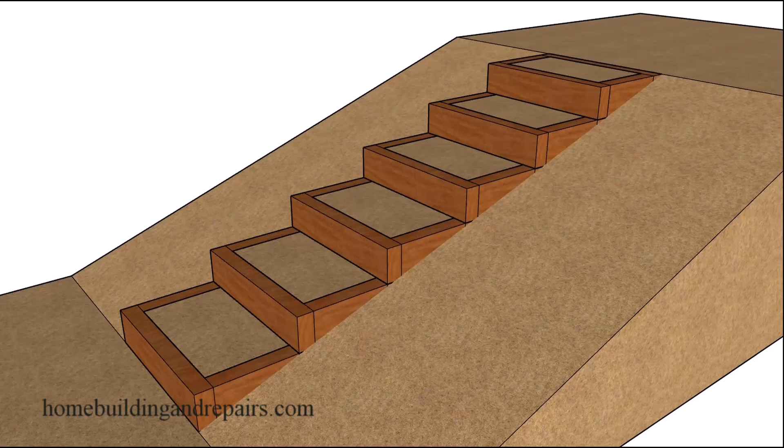Here's another outdoor stairway I come across and wonder why it was built that way, but understand that most of us look at something and think, you know what, that's easy to build and that's a great idea, I'm going to do it the same way. And that's fine, but I'd like to put a little insight or at least share my opinion with you for this particular stairway. And it's quite simple.

It's just built out of boxes. Usually I've seen people use railroad ties actually for this. 6x6s, 6x8s. These are 4x8s. They're 3.5 inches wide by 7.5 inches wide to keep the step at 7.5 inches. The maximum for most building codes will be 7 3/4 inches.

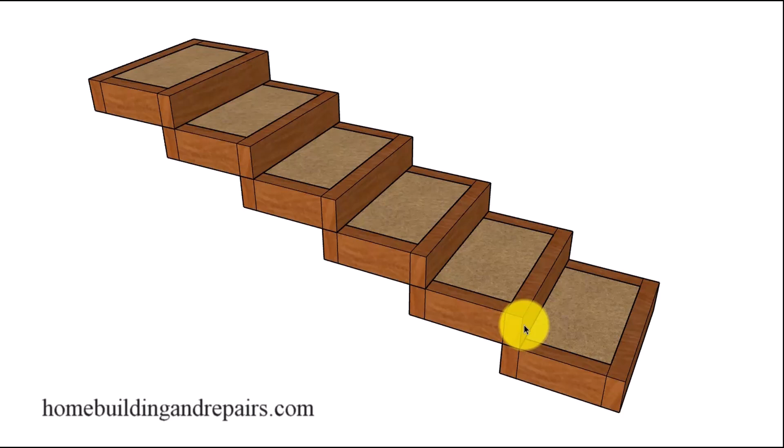If you're doing it for someone who has a difficult time walking up the stairs, you might want to use a 4x6. You might want to use something that's a little smaller, maybe 5.5 inches instead of 7.5 inches. And of course, there's a bottom view of it. Another view, to give you an idea, just boxes stacked on top of boxes and filled with dirt. So in this particular stairway, this is just filled with dirt.

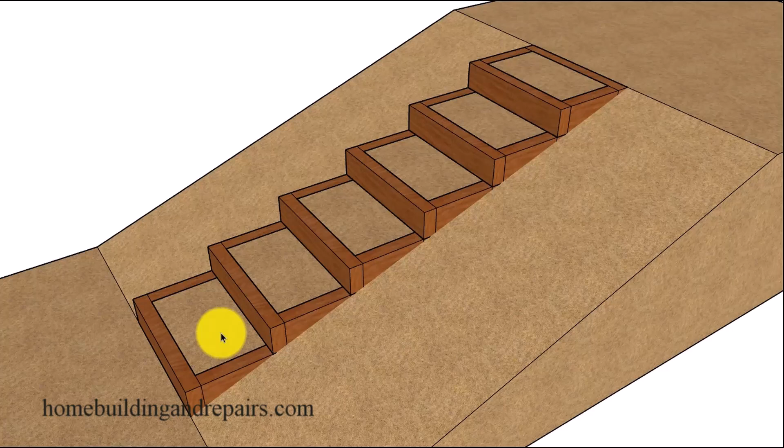I do not like this design because when it gets wet, and depending on the dirt, if it's sand, it's going to be difficult to keep in here. Sand's going to just spread all over the place. And if you get sand on the edge of this, and you're walking down or walking up the stairway a little faster than normal, this is going to be slippery. I do not like sand.

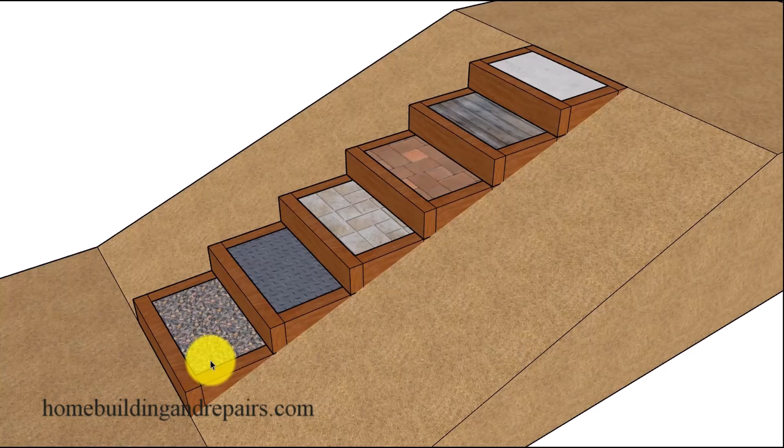And if you're going to fill it with dirt, you're going to run into the problem when it gets wet. This stuff's going to be slippery, and of course you're going to be tracking it all over the place. So dirt, not a big fan of. Now let's go ahead and take a look at a few more products: gravel, metal, tile, pavers, wood, and concrete.

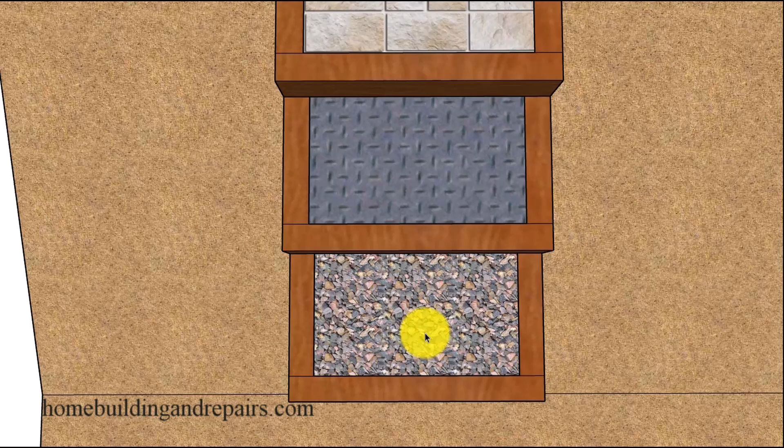And of course, gravel is what you see a lot. People fill it with gravel. And again, I understand this is easy to do. Build your square box out of wood, stack them on top of each other, and fill them with gravel. I see this a lot.

Gravel is going to be difficult to walk on. You walk up and down a stairway in bare feet with gravel, you're not going to want to do it again. Not a big fan of that. Someone runs up the stairway, they're going to knock some of the gravel around. You're going to be filling it with gravel every once in a while or refilling it.

Metal, not really a big fan of that. And of course, you're not going to see this. I just kind of threw it out there for someone who thought, hey, I need a different look. Metal over time could rust, but of course you could get some metals, maybe stainless steel or something galvanized that's going to last a little longer.

And this one here is tile. If you're going to use tile, you're going to have to fill it with concrete. You're going to have some type of a base that the tile is going to adhere to, and most of the time that's going to be concrete for an exterior stairway. So if you're going to use something like tile, why not fill it all the way to the top with concrete and use some type of a decorative pattern, a stamp or something that they use to make the concrete a little nicer. And of course, pavers.

Now, pavers would bring us back to the gravel. This is going to be something that will be a little easier to do. And if you were going to design a stairway using pavers, I would also recommend building your boxes to where you can use pavers without having to do a lot of cutting. So you could see this wouldn't be that good of a width or a length. If this was a little smaller, then you would just have these here. So if you can kind of keep it in a pattern like this, that would work better.

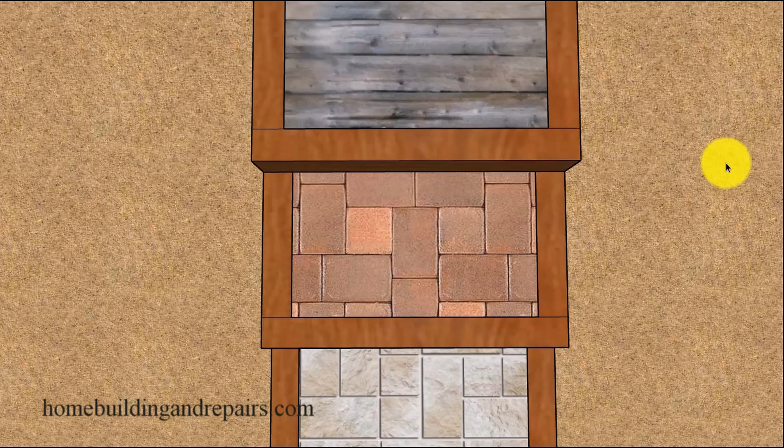And of course, wood. You think about it, this is going to be wood. You could always fill this with wood, and I think you would be okay. And if you were going to use wood for the box and wood for the steps, it wouldn't be a bad idea to protect the area where the wood is touching the soil with gravel.

Put a gravel spacer of at least 2 inches in between the wood and the soil. And again, this isn't a video on how to build this type of stairway.

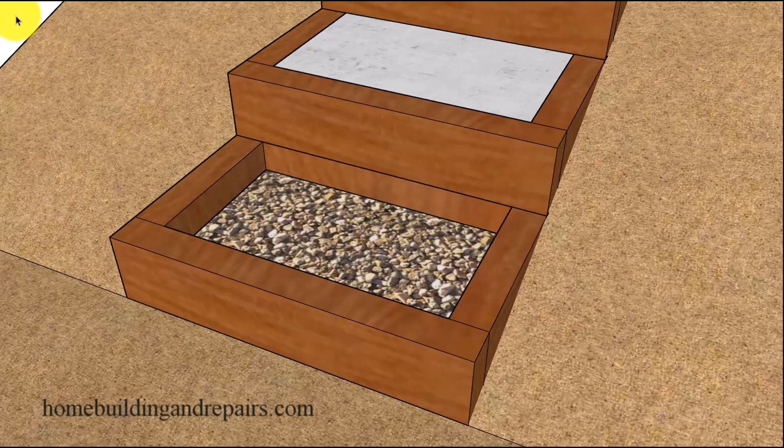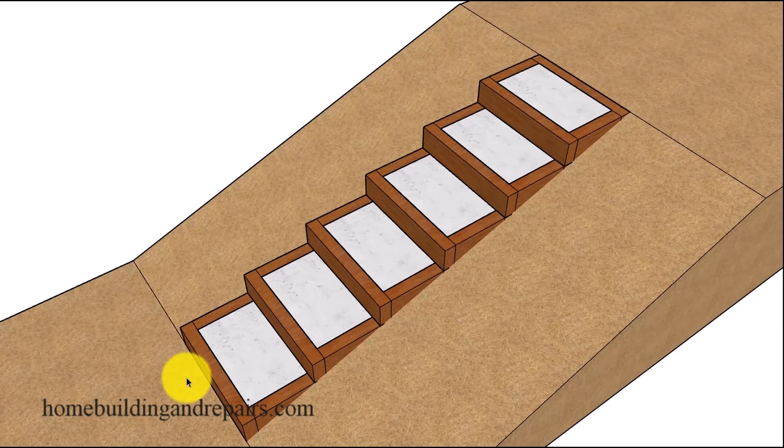Let's go back here. It wouldn't be uncommon to have gravel, and if you didn't have any area for the moisture or the water to drain away at the bottom, it wouldn't be uncommon to find the bottom step rotting and the upper steps perfectly fine, because all the water is going to flow through the gravel until it hits this area here. So it wouldn't be a bad idea to put some type of a drainage system or gravel at the bottom to where the water won't accumulate in the gravel.

Hope that makes sense. So again, fill the gravel up a little bit. Give yourself about 3.5, 4 inches. You can always use rebar if you want to. Fill it with concrete and you are done.

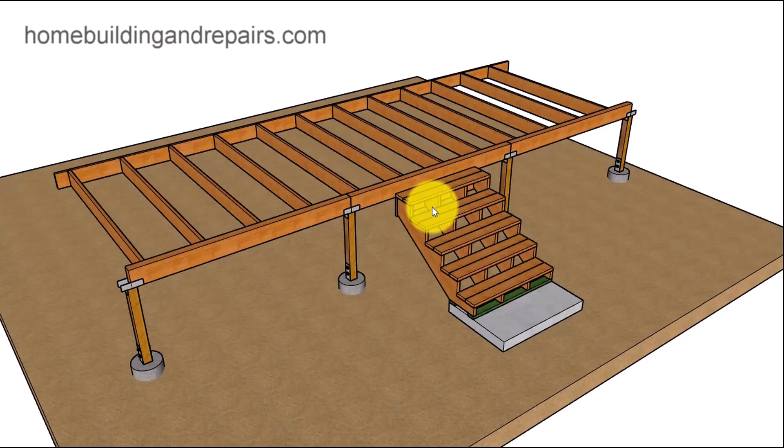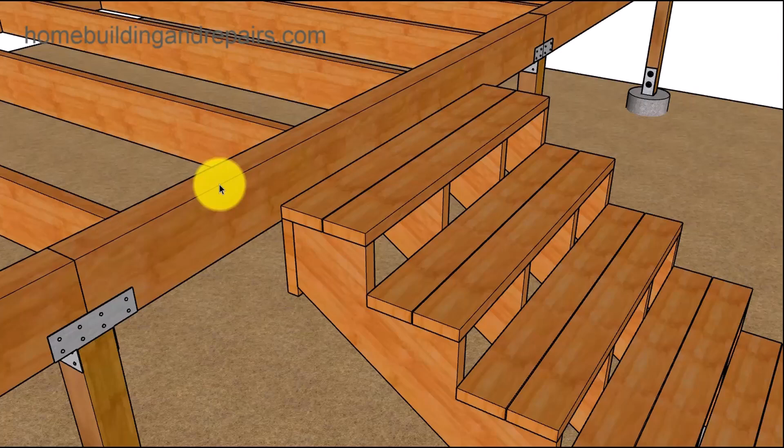In this video, I will provide you with a design idea. One simple modification that you can do to create a stronger structural connection for a set of stairs to a deck. Now, this is not going to work for an existing deck unless it was modified, or a deck that would be framed like this. But you can redesign the deck, and this isn't going to be that difficult to do. Simply redesign the deck, one small alteration, and you're going to be much happier, and you're going to save a few dollars too.

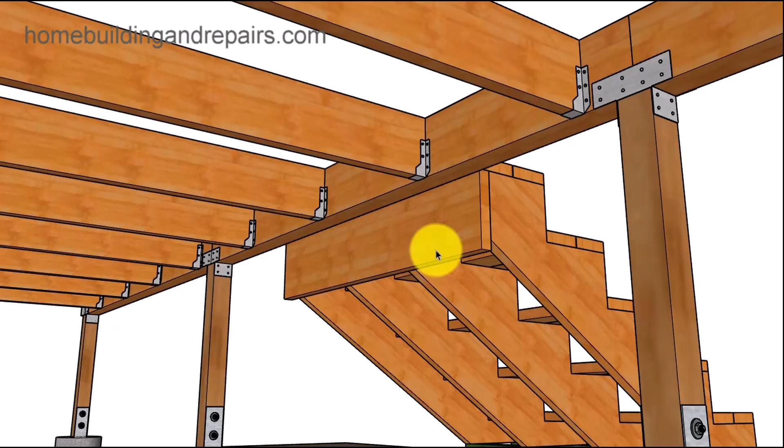So if I was to go with a deck like this and a set of stairs like this, you can see here where the stairway is not really connected well to the deck. And I've seen this plenty of times. People come in and they might put a board behind this and then nail a 2x4 on the side of it. And I'm not going to provide you with any ideas because I don't want to get you to go down that path. My job here isn't going to be to provide you with something that doesn't work, like this piece of OSB where somebody just nails it to the side of the beam and then nails it to the stairway or to the ledger.

And this again is another common one. I've seen this done a variety of different ways. I'm not telling you this isn't going to work. All I'm saying is that this has a potential for failure. If you're working with an existing deck and you're looking for something to connect the stairs to, don't use a piece of OSB. It gets wet, it expands, it can fall apart. I'm saying it can. A piece of plywood can also fall apart.

It can delaminate. If you're going to do something like this, you might want to use some boards and run them down. Maybe some 2x6 or some 1x6, something that is construction standard lumber. Use that and you're going to at least eliminate the chance of it falling apart. And again, I'm not going to draw it in here because this one here is bad enough. And by now you're probably wondering, what's the secret? What's the big deal? This is it.

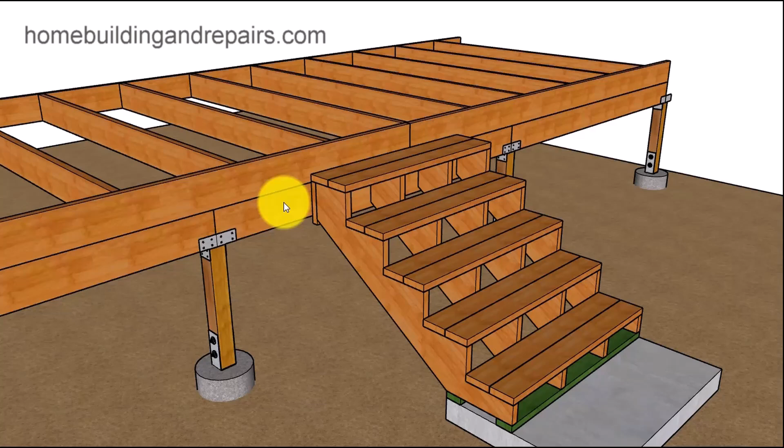Just simply lower the beam, reduce the length of the post, provide yourself with more surface area to attach the stairway to. That's simple. Now, where do you save money in a situation like this? By getting rid of those expensive joist hangers and setting the joist on top of the beams. Now, another thing I just want to point out, I like using ledgers for my stairway, but this is probably going to provide you with enough surface area.

What I don't like to see on decks, and it seems like this pops up more and more, is any areas where you have two pieces of wood connected to each other like this. Because what that does is it allows moisture to get in between the two pieces of wood, and it can actually absorb into each piece and remain there longer. And if you get enough moisture over a long enough period of time, it's going to rot out either one or both of those pieces.

So if you want to eliminate something like that, maybe you want to just connect the stringers directly to the beam like we have here. Just cut the stringers a little longer. Don't allow or deduct for a ledger. And if you don't like that idea, you want it a little stronger, add a joist hanger.

I do realize they have other types of building hardware you can use that might work. This is just something that I've come across where engineers seem to use a lot of these on residential construction. And of course, that's what I've worked around, spent the most time around.

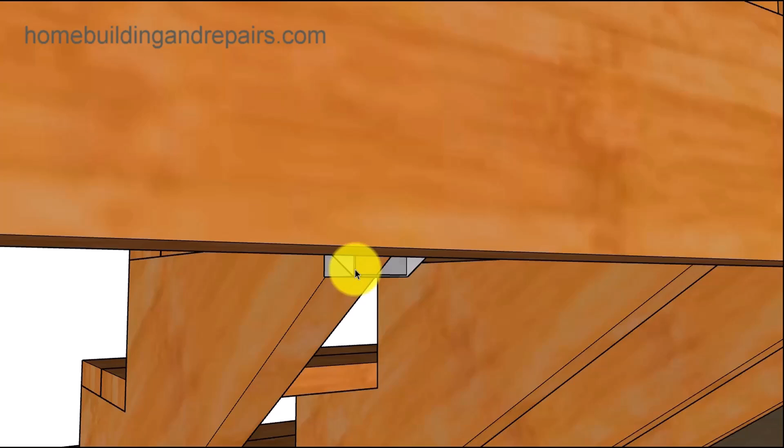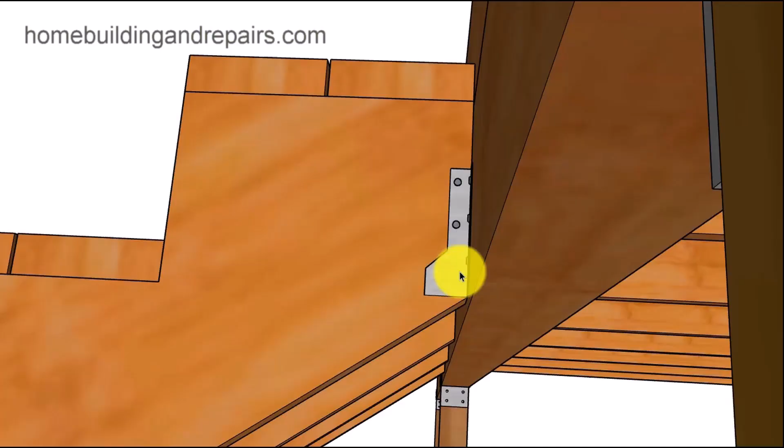Now, this method right here might produce a safety problem. Last thing you want to do is have a sharp edge sticking down from your deck. And I know you're thinking, hey, nobody's ever going to go around it. Whatever, I got you. But if you want to eliminate something like this, all you need to do is raise it up and then just simply cut a notch into the stringer. So if this is about 2 1/4 inches, just cut a 2 1/4 inch notch into the stringer.

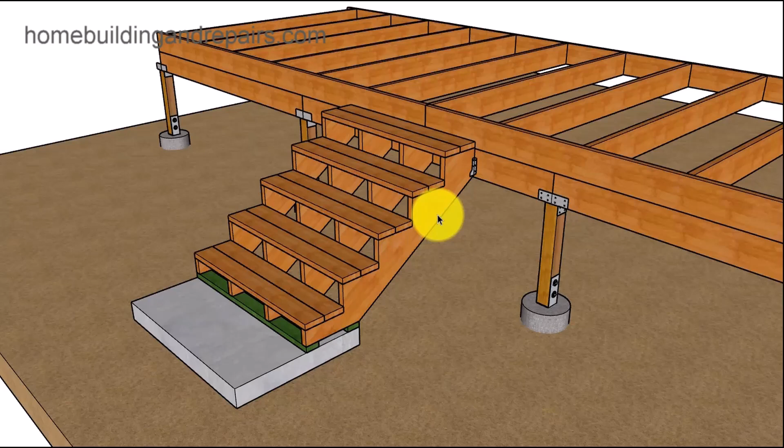And that, my friends, is how this problem here is solved. You can save a few dollars by getting rid of the joist hangers, except for the ones you got to put in here. And you actually have a stronger stairway structurally.

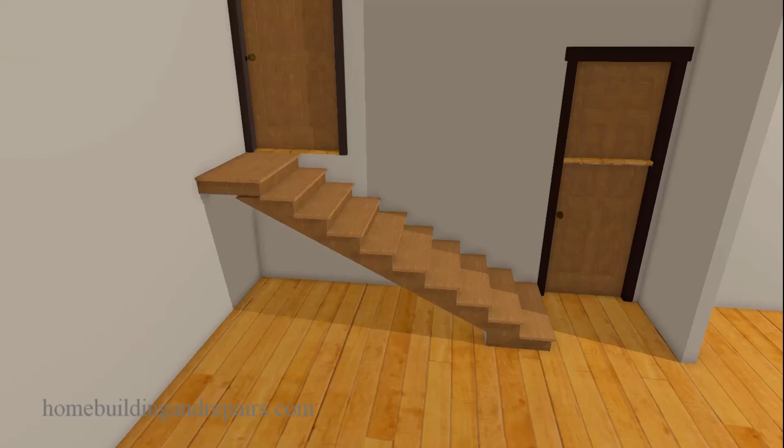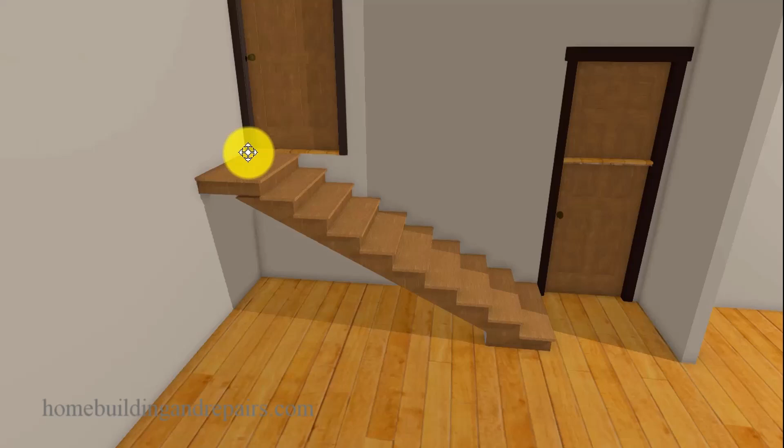Here's something you are not going to see every day, and I believe this is about the first time I ever witnessed it. Someone sent me a picture, and it looks something like this. The edge of the landing, the front nosing, was located about in the middle of the doorway, and in reality it needs to come out to the edge of the door, and of course that would depend upon the width of the door. I think most building codes require a minimum of 36 inches, 3 feet in both directions, but of course that would change if you had a door, and I'm not familiar with those building codes.

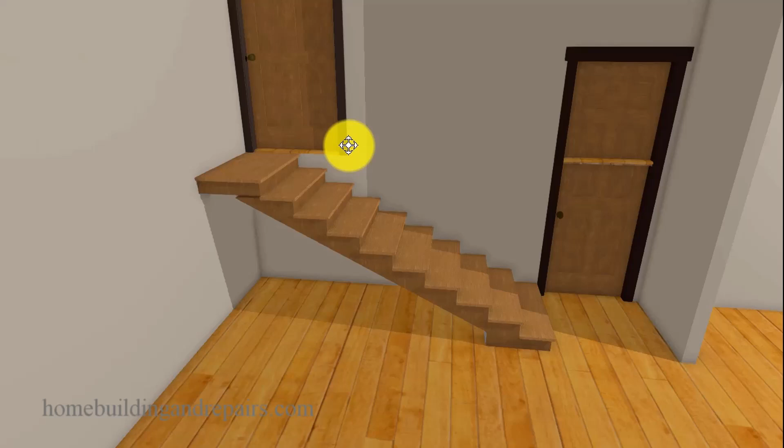But realistically, the only way you're going to fix something like this will be to shorten the width or the depth of each individual step. And it's the only way I could think of fixing something like this. And it would be up to you to figure out if it's going to be even worth changing. Because sometimes you are going to create a bigger problem by having a tread that might be a little smaller than approved by the building code.

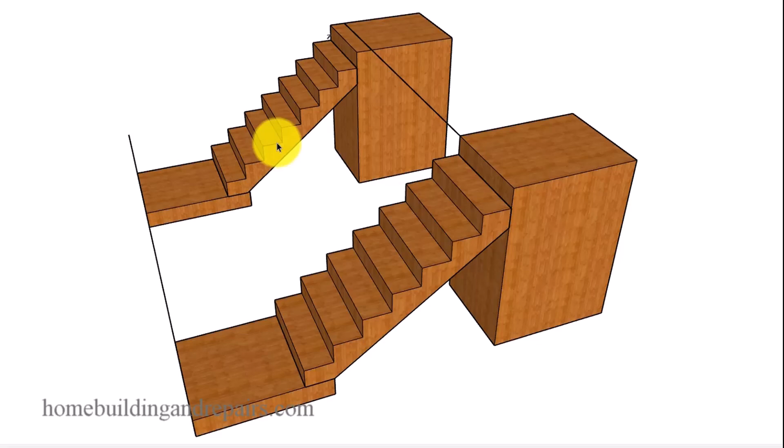So you're basically trying to solve one problem, make the landing a little longer. But if you don't have enough room, you're going to be creating another problem by making the steps a little smaller or the risers a little taller. So let's just go ahead and take a look at what we got here. You can see here, these are 10-inch treads, 1, 2, 3, 4, 5, 6, 7. So we would have 70 inches between the face of the landing at the top and the face of the lower tread if we drew a horizontal line. I'll show you more what I'm talking about there in a second.

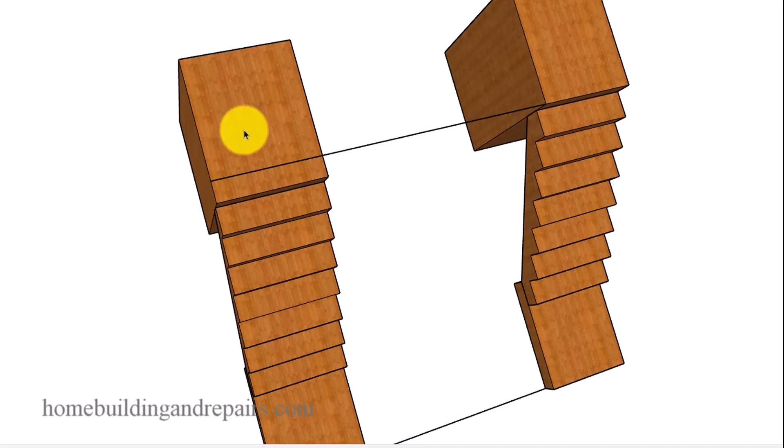So this right here will give us 7 more inches. 7 steps. We take 1 inch off of each step, and we now have a 9-inch tread. This is an illegal tread according to most building codes, but you would need to verify that in your community or through your local building and safety department.

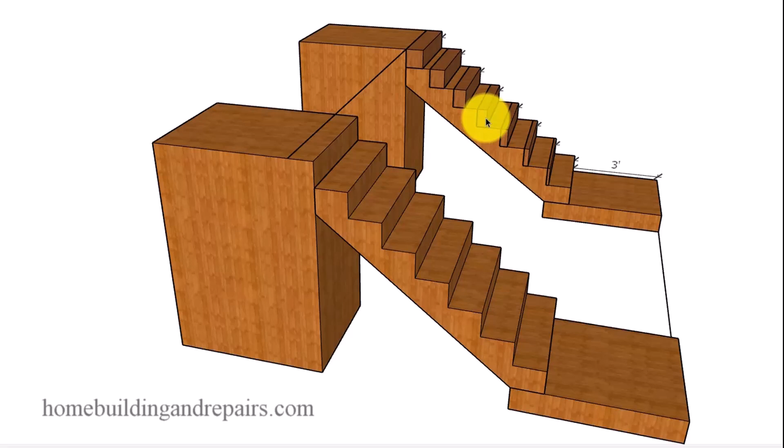If you're looking for a method to fix something like this and you don't want to tear apart the stairs, you could simply add incremental sections to the front of each step to create the new stairway. So we're at 7 inches here. We would need to add a 7-inch piece to the top, but only a 1-inch piece here. You would add 1 inch, 2 inches, 3 inches, 4 inches, 5 inches, 6 inches, and 7 inches to the front of the stairs to eliminate cutting a new set of stairs or building a new stairway.

So something like this might work. Again, I'm just kind of throwing out an idea here. Something else you might want to do would be to remove one of these steps. So we have 7 here. 1, 2, 3, 4, 5, 6, 7. We have 5 foot 10 inches, which is 70 inches.

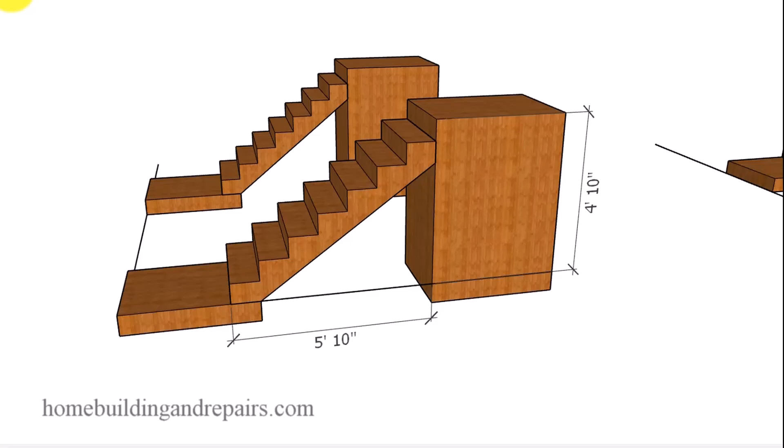And if we simply make it a little smaller, 1, 2, 3, 4, 5, 6 steps, if we can eliminate a step, but that would increase the riser height, then that might be another option. But of course, this would involve tearing apart the stairway and rebuilding it.

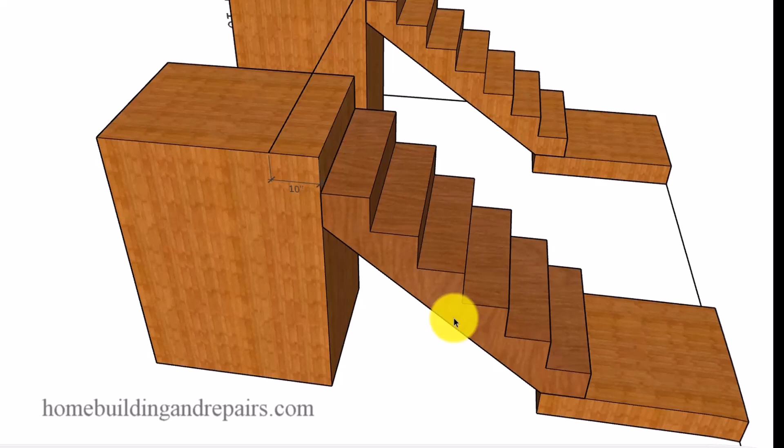Now for the bad news, I would imagine that your stairway was built that way for a reason, and you might not have enough room to build a stairway that's going to meet local building codes. So let's just go over the building codes. 7 3/4 of an inch is usually the maximum height for each individual riser. And the depth is usually going to be 10 inches for a residential set of stairs for a private dwelling. Now, you would need to check with your local building department to verify that information.

And I hate to say this, I wouldn't bring this to your building department's attention. I wouldn't say, you know what, I've got a problem here, because they could make you do some work here. So I'll leave it up to you whether or not you want to bring it to their attention. I have known people who have brought stuff like this to their attention, and it's cost them thousands of dollars. But I'll leave it up to you. You want to leave something unsafe or you want to fix it, do it right. That will be your final decision.

Now, here's the distance I was talking about when I was asking the person in the email to measure between the doors. If you have enough room here, this will determine your tread size and how many treads you'll be able to use. If you have 70 inches here, then you're going to be able to put 7 steps. If you have 60 inches, but you need 7 steps, you're probably not going to be building a safe stairway. So I think I've driven that point home enough. You would need to do all the calculations.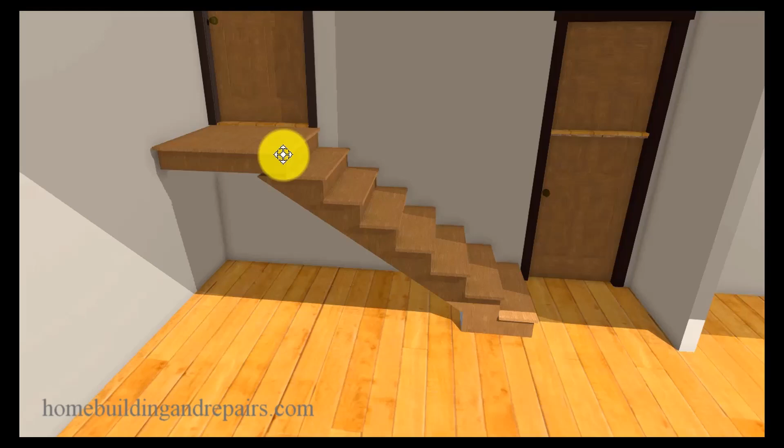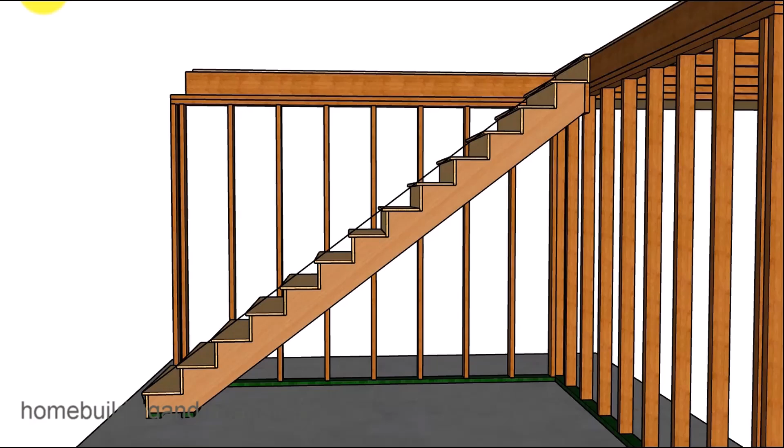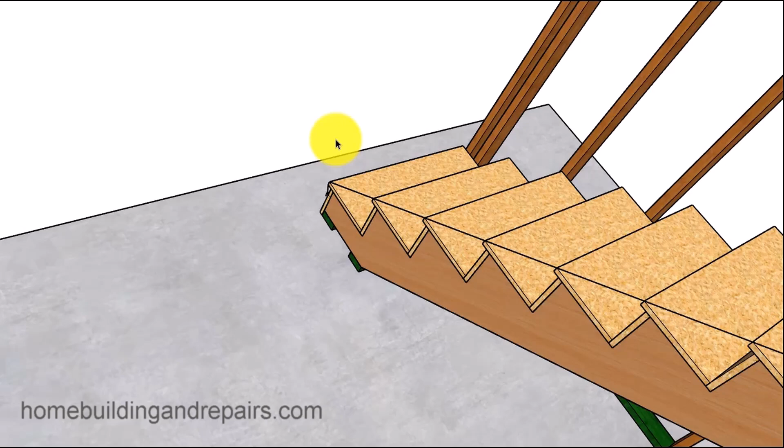Here is another question that someone asked. They wanted to know if there was an easy way to check your long stairway to make sure that it's actually straight. And you could do it with a string. Just simply put a nail or a screw into one side of the stairway and put it in at the other side, and then pull the string tight, and then you can simply go up the stairs and see if the string is touching the tip of the stair tread, like this right here, or if it isn't. And if it isn't, then you have a problem.

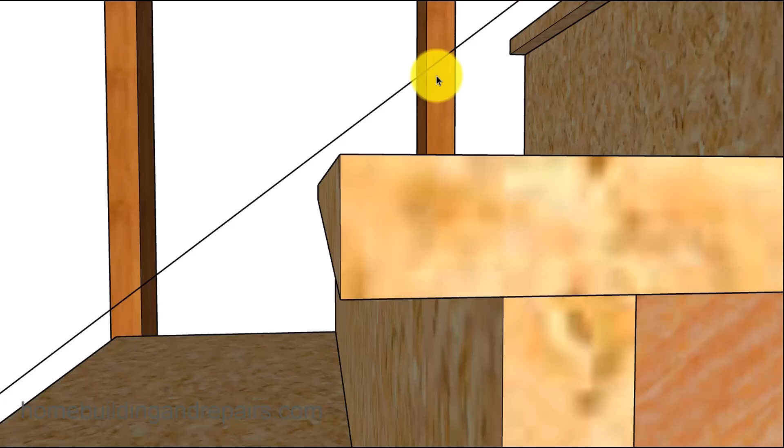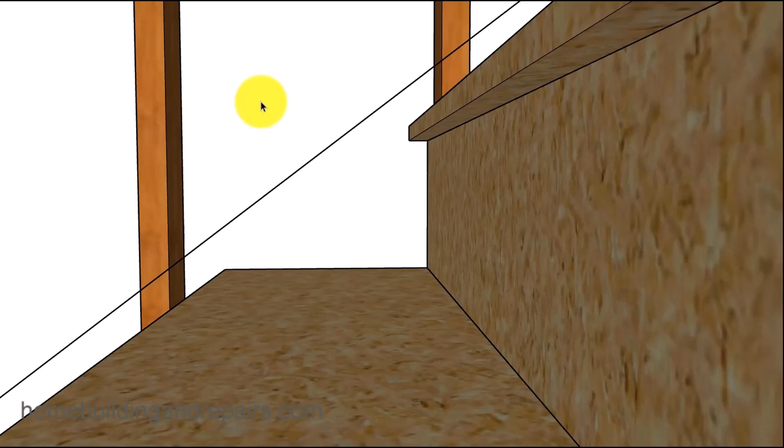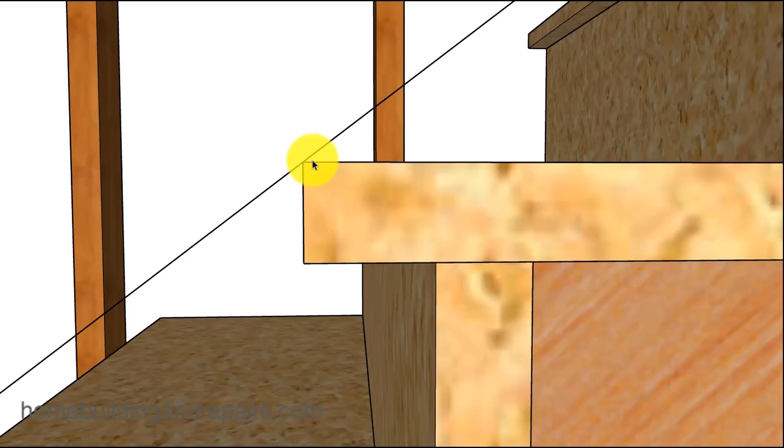Now before I get carried away here, if you're within 1/8 of an inch or maybe 1/4 of an inch in the middle, that's probably not going to be a big deal. If you have 1/8 of an inch on one, 1/4 of an inch on the other, and then you're tight on the next one, then that could be a problem. But if you're off a little bit, then this could go back to what I was saying, to where you could have a sag in the stairway, or actually a crown in the stairway. And another problem could be that you miscut the stair stringers, the treads, or the risers also. So I can't just say it's going to be one thing. You'll have to actually figure out what that one thing will be.

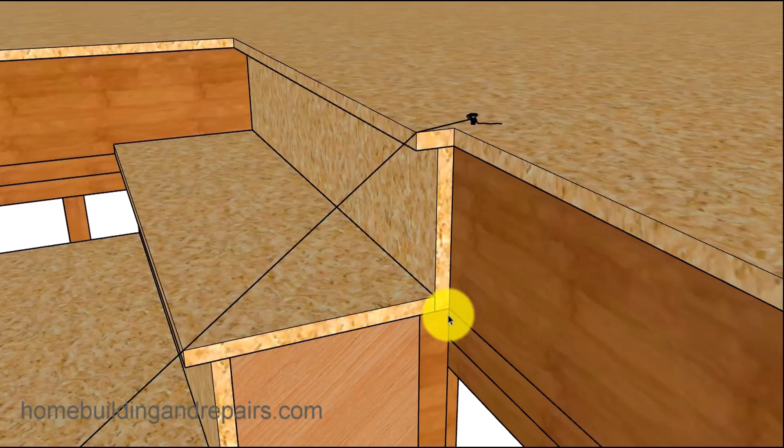So here's the stairway as it's built perfectly with a computer. Everything's nice and straight. But your problem with most stairways is usually going to be at the top or the bottom. And at the top, that could be as simple as forgetting to deduct for the ledger, which would create a situation like this, to where the last step is going to be a little longer. And then you're going to pull your string tight. Your string is going to be tight. It's just not going to be straight. And again, this could be caused by a few other problems with the stairway.

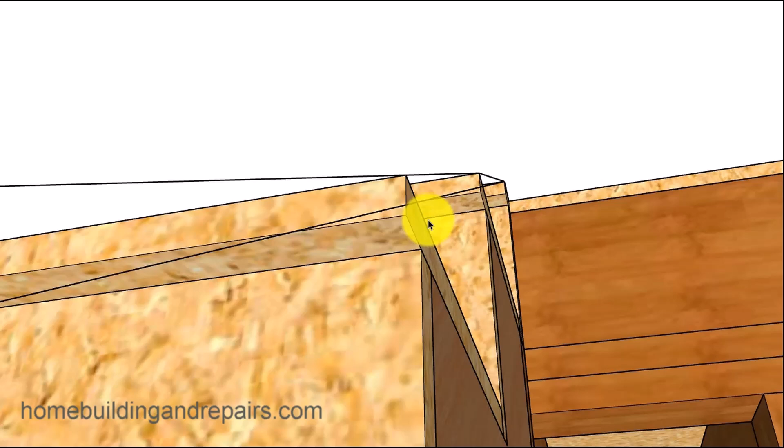So here we have our bottom straight line, but yet when we pull it tight, it's actually straight all the way to here, and then here, and then it angles back to here, which, using the first method, would give you the impression that everything's fine when it really isn't.

So you can see here where if we brought this out a little further and then use this point, then we wouldn't have a problem. And I'm not about to suggest that this problem couldn't be found by simply measuring the depth of the stair tread and the height of the riser, because it can be. You just simply measure it and find that problem.

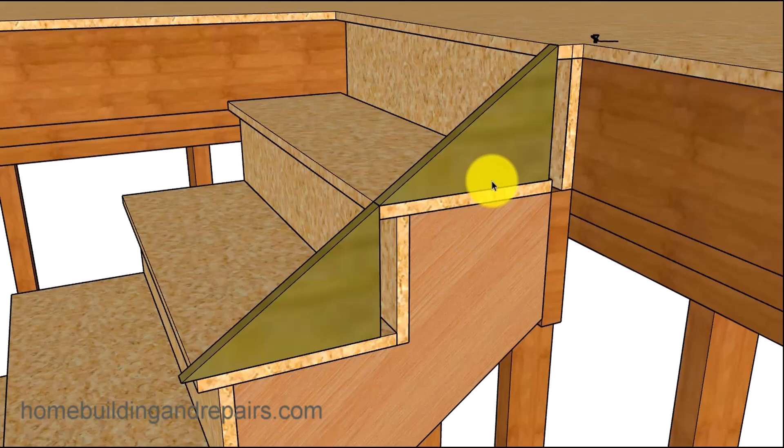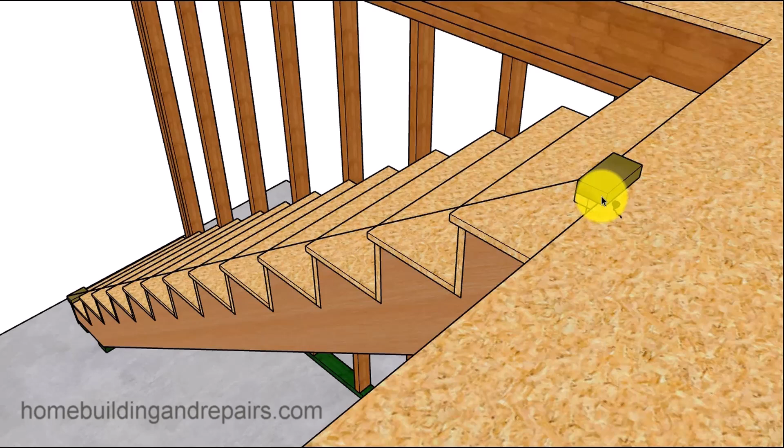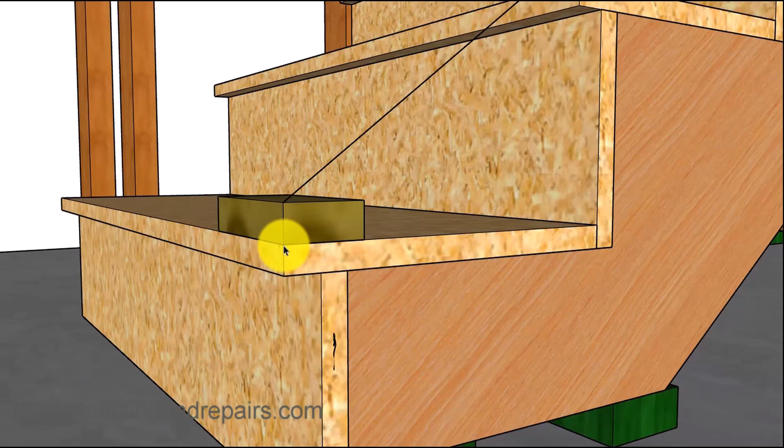But in order to figure out if the stairs are actually straight and are not sagging, they're not dipping in the middle or crowned somehow in the middle, then you might want to use this method here, where we attach a block at both sides of the stairway. And of course, both of the blocks will need to be the same size and in the same location. So you're not going to want to put this block back here or have it extend further. It needs to be at the front of the tread, lined up, same height, in which we're using a 1-inch block here, 1 inch by 2 inches.

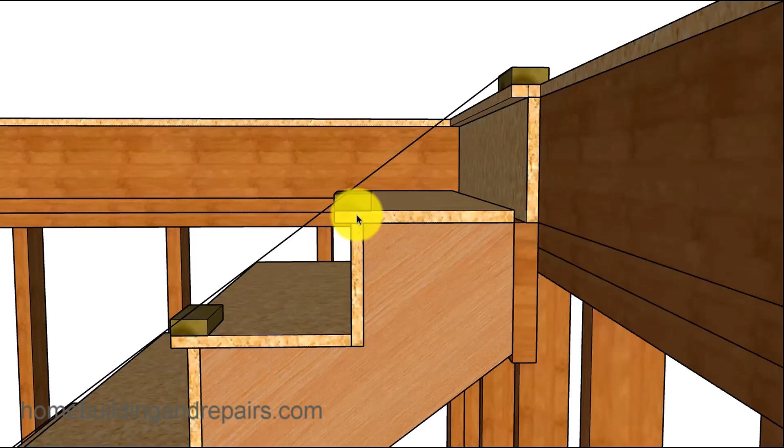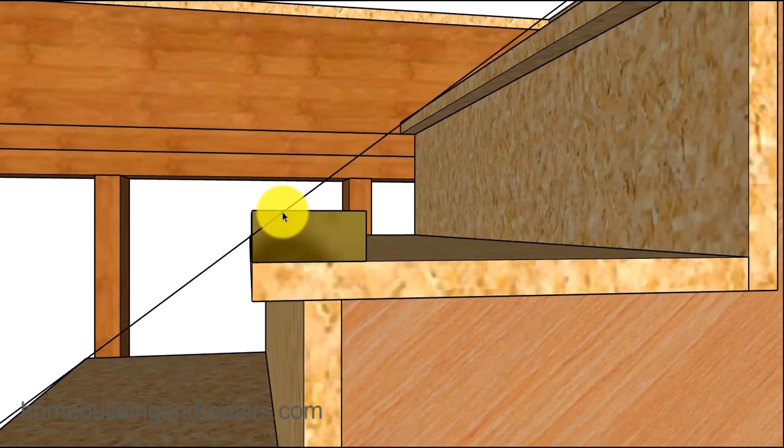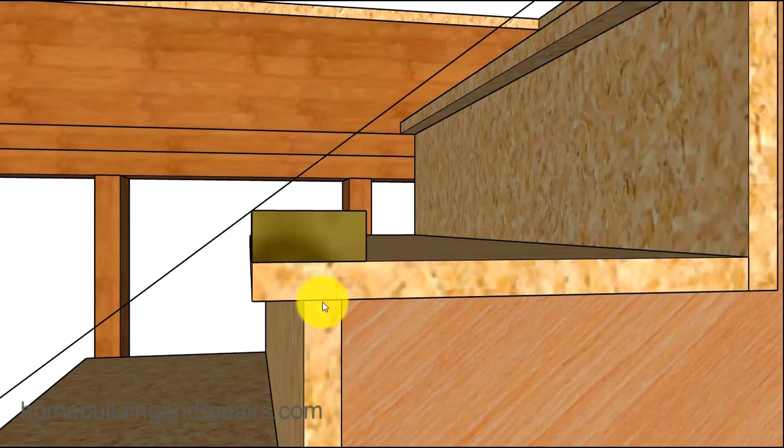And then we attach our string to that, get it nice and tight, and then use the same size block to check everything. So this isn't that difficult. We don't have to measure anything. We just simply slide the block into position here, and we can see we've got a problem. And if you remember, the problem, of course, is at the top of the stairway. The top tread is cut a little longer. But if it wasn't, then it would look something like this. All of the edges of the blocks would line up and everything would be straight all the way down.

So again, any variations, if you take the block and you have it right here and it's off 1/8 of an inch, you're going to know then that there's a small variation. If you put the blocks on the front of each tread in the same position and everything is right on the money, then you know you have a straight stairway. Now, if the stairway is sagging, you can always raise it up. You can always, of course, put a wall underneath it. If the architect has it designed to where there is no wall underneath it, then you're going to be stuck with what you have to deal with.

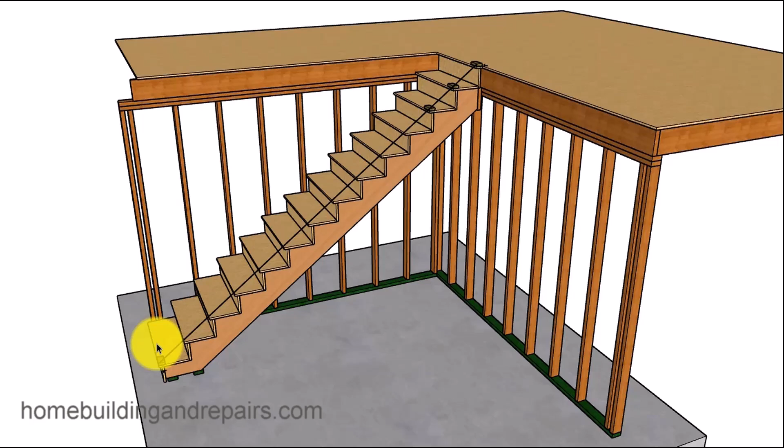So that is it for this video. If you check your stairway and it's off 1/8 of an inch or 1/4 of an inch, but everything measures the same, it's nice, it's easy to walk up and down the stairway, I wouldn't worry about it. There are no building codes, at least I haven't found any yet, that require the stairway to be perfectly straight. They just require the measurements to be the same for the treads and the risers.

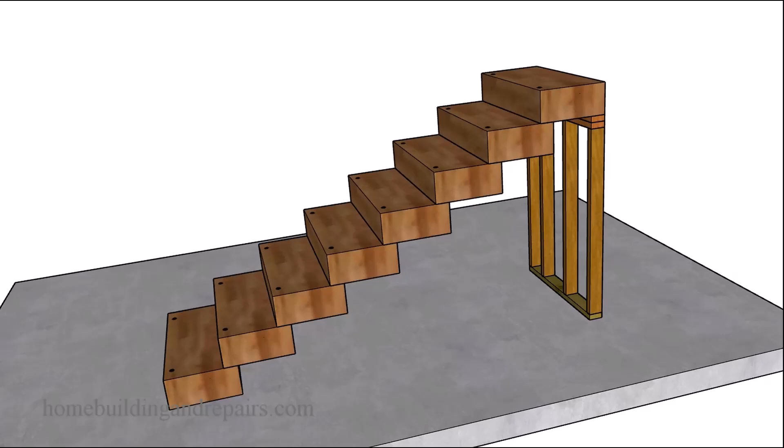Here's another one of those crazy stairways I have seen built before. Never built one myself. Remember, I am not an engineer. I do not guarantee that something like this will work. The last thing I want to do is provide you with something and tell you that you can make this 50 foot long. I cannot guarantee that. Would something like this hold up if it was made out of 4 or 5 steps? I don't think it would be a problem. But when you're building a stairway that's even this size, it could be. And I would hate to tell you you can build something like this without any engineering on it. Just ain't going to happen. So build this at your own risk. I'm just kind of throwing out an idea, something I think might work.

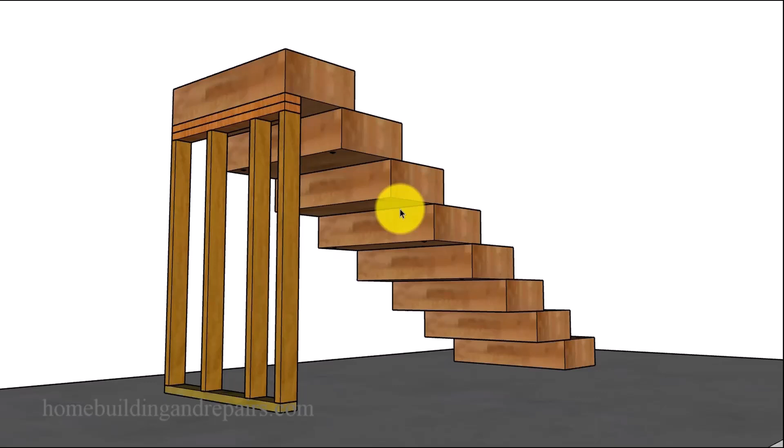And that, of course, would be bolting some large pieces of lumber together. And you can always put a few more bolts in. This has 2. You could put 3 or 4. You could put metal brackets on the back of it for some extra support. And of course, you could always put some braces under it, maybe a wood post under the middle of it for some additional support. That's where it would be the weakest. You build something like this, and it would tend to have problems more in the center. Or even a couple of posts might be needed on longer stairways.

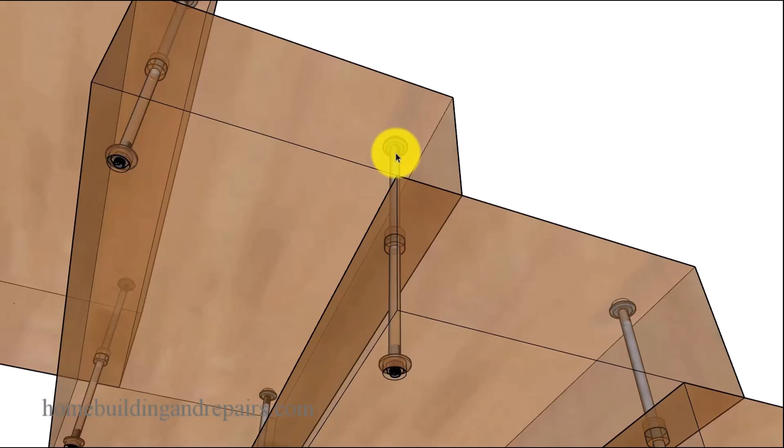Now, just simply an 8 by 16, this is 7.5 inches by 15.5 inches. Large piece of lumber, and just bolted together with some all threads. And I think in the diagram here I'm using 1/2 inch all threads. And you can just see there's a washer and a nut at each end.

And again, like I said, you might need 1 or 2 more of these depending on the stairway. And of course, you might need larger pieces of lumber for something like this. Instead of something that's 15.5 inches, you might need something that's 16.5 or 17.5 inches, or even a little longer depending upon the step.

7.5 inches is pushing it for the riser height, and that might not even be something that would be approved on a public stairway. I think a public stairway is 7 inches. Private is 7 3/4. Keep that in mind. I do have other videos on that.

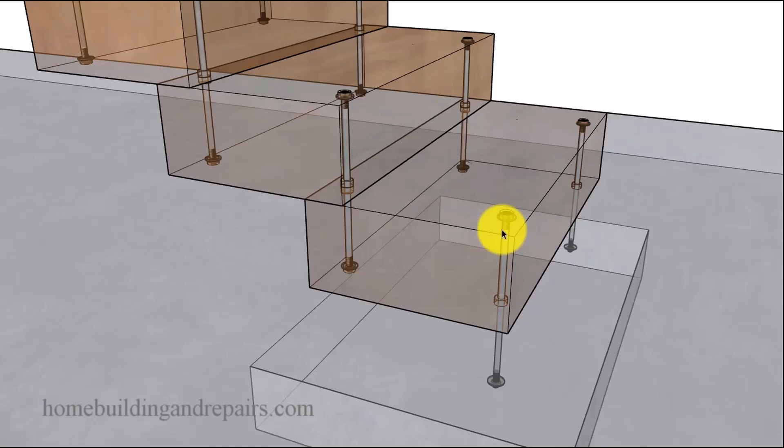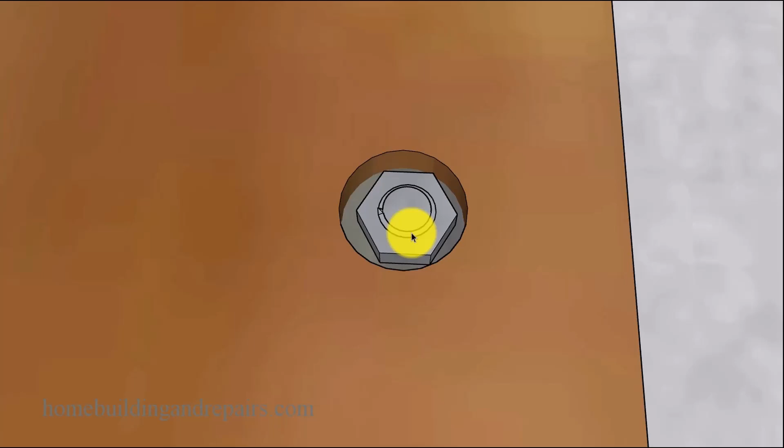You could attach the bottom into the concrete slab with another all thread and some type of an epoxy-based concrete system. And then, of course, you're going to want the nuts and the washers, or the top of the all thread, to be a little lower so that you can put plugs or some type of filler in there. I don't want people to be tripping over anything sticking above the top surface of the step.

And again, like I said, throwing this out there, seen it done before, think it'll work, but you'll build this at your own risk. Let's go ahead and take a closer look at the block, what might need to be required. So here's what the all thread might look like. Of course, I don't have an all thread here. This is a bolt design.

An all thread is threads all the way down. If you can get a bolt like this, it might work for you just fine. All threads are more common. And of course, bottom of it. Just wanted to give you an idea. Sometimes a few more pictures can help people out. That would be countersunk in a little bit to allow for the width of the washer. Top view of it here.

And if you drill these holes the same distance, I think I have it here about 1 3/4 inches away from the edge, but yours might need to be different, might need to be a little deeper. And I did the same on the side here, and everything lines up that way. But you will have to figure out where to drill these holes.

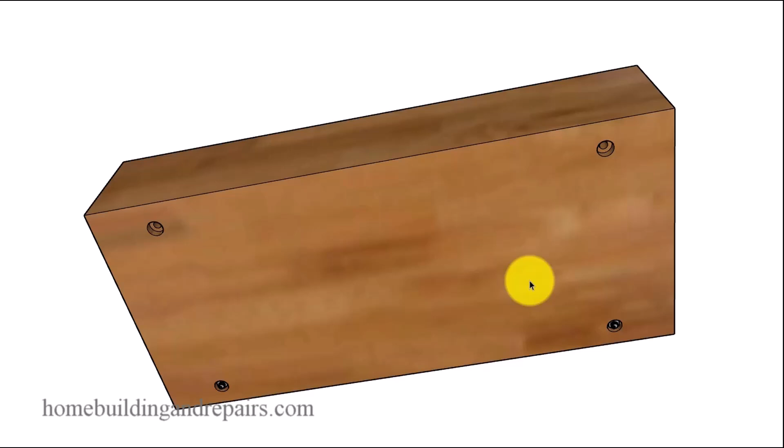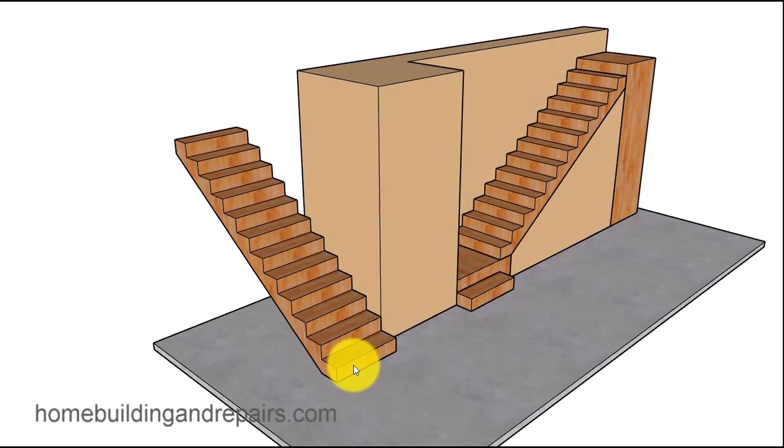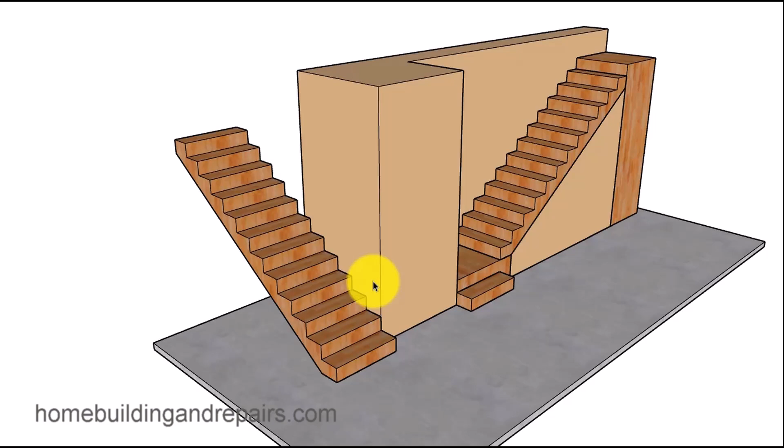In this one here, we are going to answer a question that was sent to me. The individual is going to be working on the bottom step and trying to shape it and put a little angle on it for decoration. And you can do that as long as you're not encroaching into the minimum area of your building code requirements. So the information in this video, even though I'm going to focus on this one here, is also going to apply to other types of stairs. Just wanted to point that out.

So we have a set of stairs that comes down to a landing with one step. And the individual wants to angle this off here. And you can do that as long as it's on the other side of the minimum distance required by the building code. The building code usually requires, for residential stairways, to have 36 inches. Residential stairways are usually stairs that would be in a house or some type of a dwelling where people would live. So 36 inches is the minimum, usually going to have a 10-inch minimum tread depth, something like that.

So the step, the decorative portion of the stairway, can go on the other side of this, just can't go in that area. So let's go ahead and put our handrail in here, and I just kind of drew a flat area. The area on the other side of this is the area that's going to apply to our building codes. So we can add something to the other side of it like we did here. And of course, we could always add something to the other side. We still have our minimum distance required by the building department.

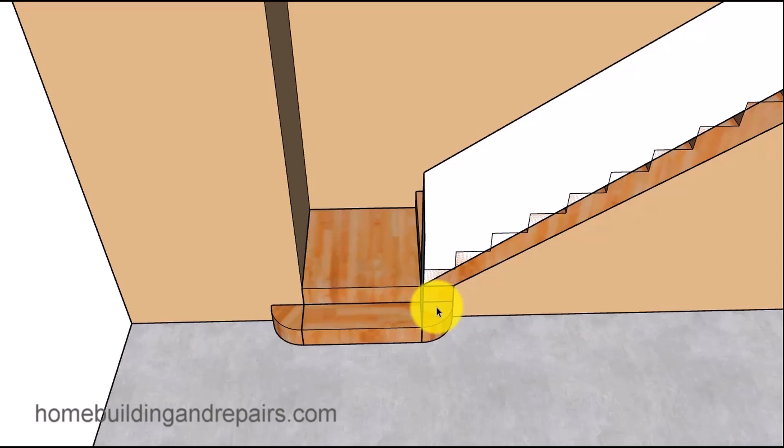Now would be a good time to point out that this is my interpretation of this. This is what I've done as a stair builder. Now, I do have to say you would need to check with your local building department, building authorities, to verify this information. If you're in another country and you're watching this YouTube video, and you're thinking, hey, I'm going to go ahead and do that. No, it might not work if you're in another country or even in another province or state. I'm in California. I've never run into a problem doing it this way, but I can't stress this enough.

If you're designing a house, you want to get a little fancy, thinking outside the box, it's always going to be good to check with your local building authorities. And of course, this can apply to other shapes. You can bring the step out a little further, not going to be a big deal. You can use these shapes here. So we can have it square, just extend it, or we can have it angled off, or we can have an angle coming out a little further. So on the other side, like I said.

Now let's go ahead and remove the hand railing lines or guidelines that I had there and give you an idea of the tread going all the way across. I know I had it in sections here, and that can be confusing, but this would be one solid step. So something like this is fine. We have our line that would be over here. This is on the other side. Something like this could be a problem.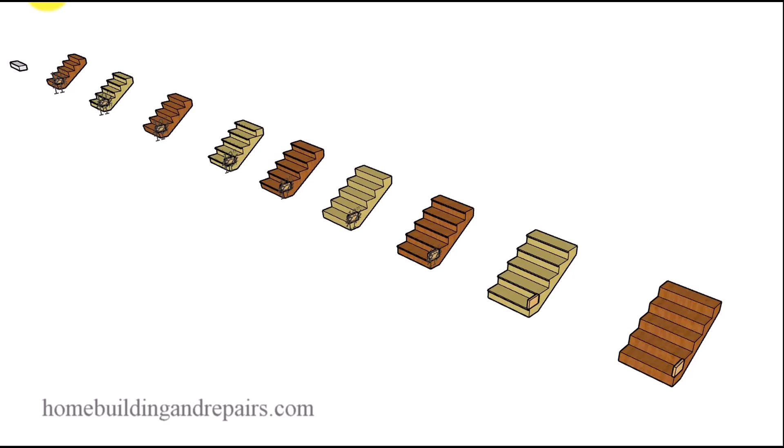In this video, I'm going to provide you with a few different examples of a stairway and which stairway will be accepted and which one will not be, referring to the International Building Code Book 2018.

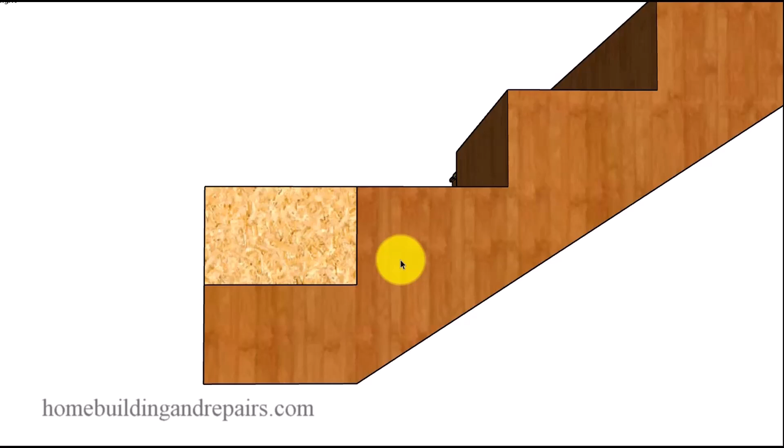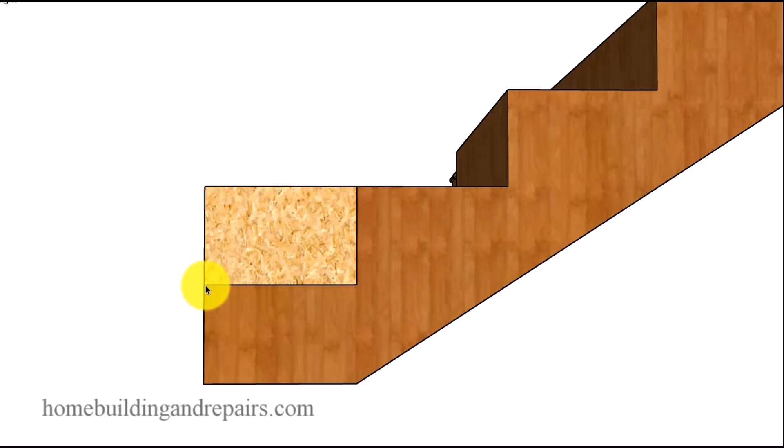The minimum building code for the tread depth is 11 inches and the maximum rise, I believe, is 7 inches. And that's actually what I did. I just created a block of wood here to make everything simple. And you can always check your stuff with a block of wood or a framing square. I think I've actually made a previous video on that, checking it with a framing square. But this is just a block of wood, 11 inches by 7 inches. And this right here would be acceptable.

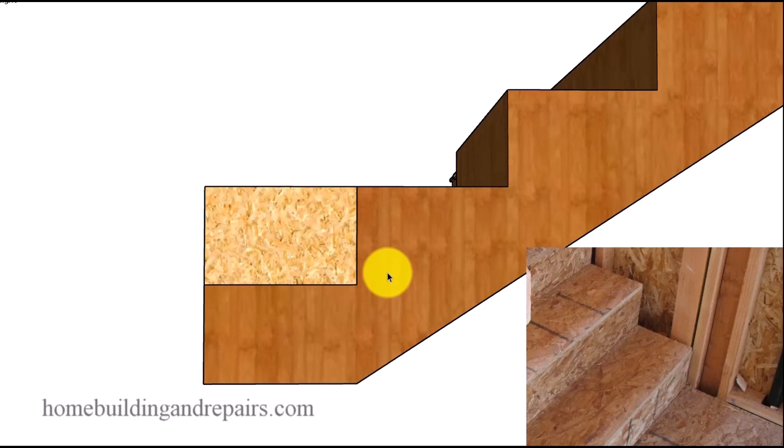By most building departments for a public stairway. Residential stairways can be a little less. We'll get to that in a little bit.

Now here's a stairway with a nosing. It has a 1-inch nosing, and the measurement is going to be from the front of the tread to the front of the tread on the stairway. And if you notice over here, the front of the step, the front of the tread right here is a straight line, and the front of the tread here is a straight line, no nosing. This one here does have a nosing, and this is also fine because it meets the building codes. I hope that makes sense.

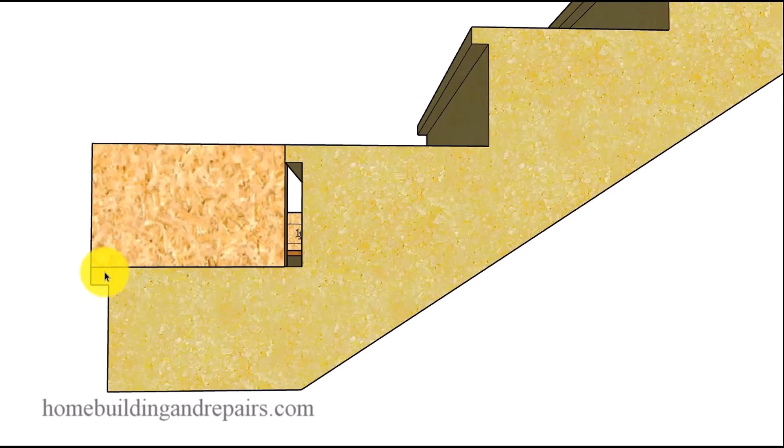Front of the step or the front of the projection of the step in some cases, which is what we'd be looking at here. So it is not measuring from here to here. So we have an 11-inch block and then a 1-inch overhang. So we would have a 12-inch step. And I understand this gets confusing to people when they are going to do something like this for a residential stairway. So this right here is acceptable.

They actually have a clause or an exemption in the building code book to where 10 inches is fine for a residential stairway or a home that most people live in. But again, I'm just sending these out there. It's your responsibility to check with the local building department. They might not approve this stuff. It depends. These videos are watched all over the world.

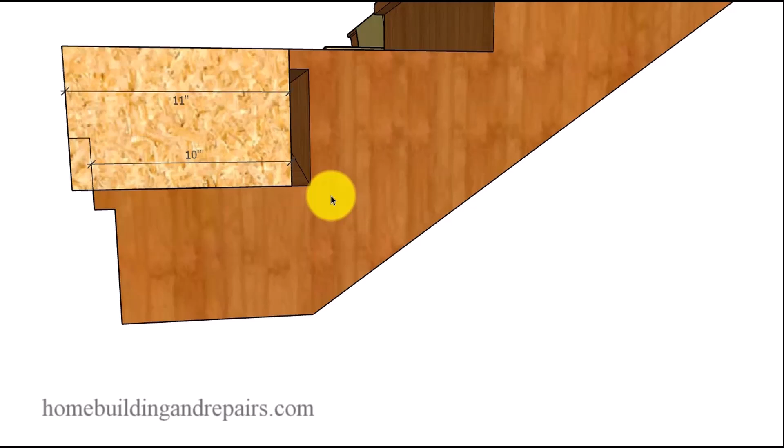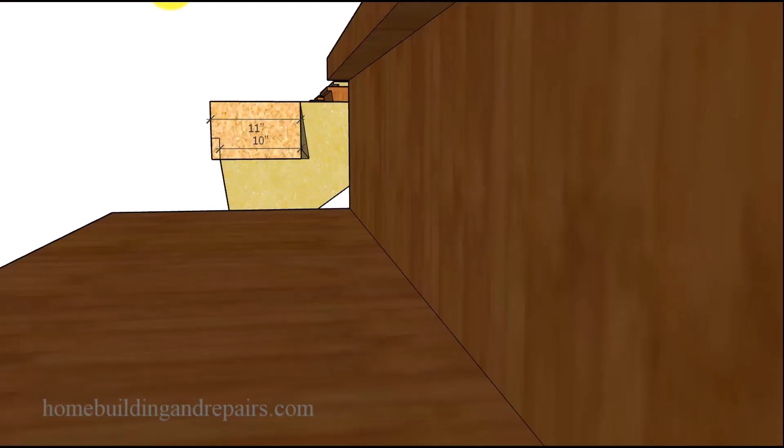And of course, we're in the year 2019 right now, March of 2019. And the building codes could change and make this video obsolete. And of course, I will try and make another video if that's the case. So here we have front projection, 10 inches. We're fine here.

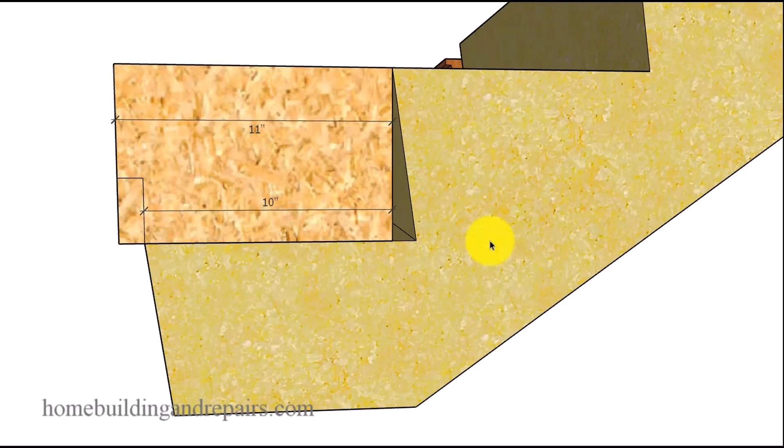Next example, we have a cutback or a setback in the stairway. So instead of having an overhang, we have a setback. An undercut is what we used to call them. So the very tip of the stair tread to the very tip of the stair tread here is 10 inches. This is fine for a private or a residential stairway.

However, this one might not be because it breaks another building code rule, and that is, of course, the projection of the nosing. It cannot be greater than 1.25 inches. So in this example here, we have 1-inch nosing, and then we have a 1-inch undercut. So we have 2 inches here. The distance here cannot be greater than 1.25 inches.

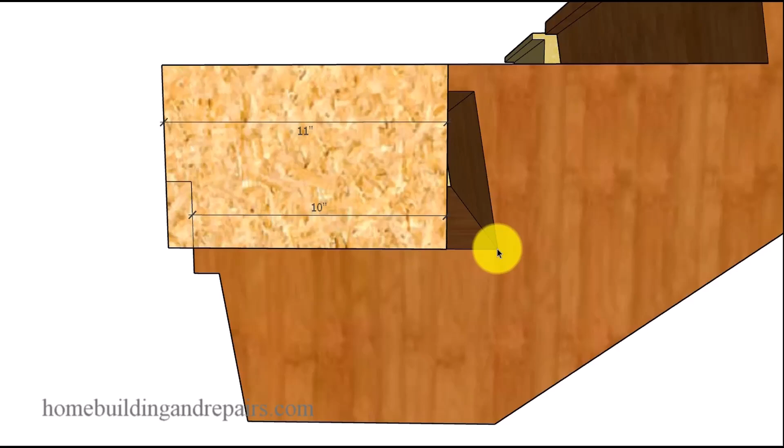So even though we meet the 10 inches for the minimum tread depth for most residential building codes, we do not meet the nosing projection building code, which creates a problem. I hope that makes sense.

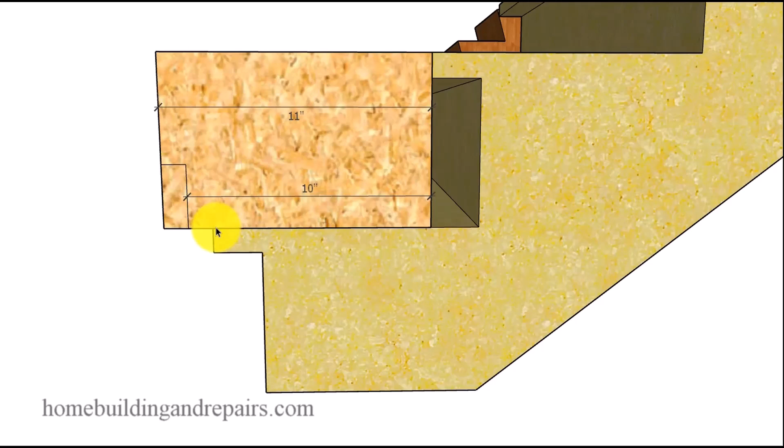So here we have another situation where we have a 2-inch overhang. And I've seen this before. People come in and here we have a 9-inch tread because we have a 2-inch nosing. I kept these measurements the same. We have 11 inches here. And the nosing projection here is not going to meet the nosing projection building code of a maximum of 1.25 inches. It's 2 inches. And of course the tread is not going to meet the tread depth because it is 9 inches.

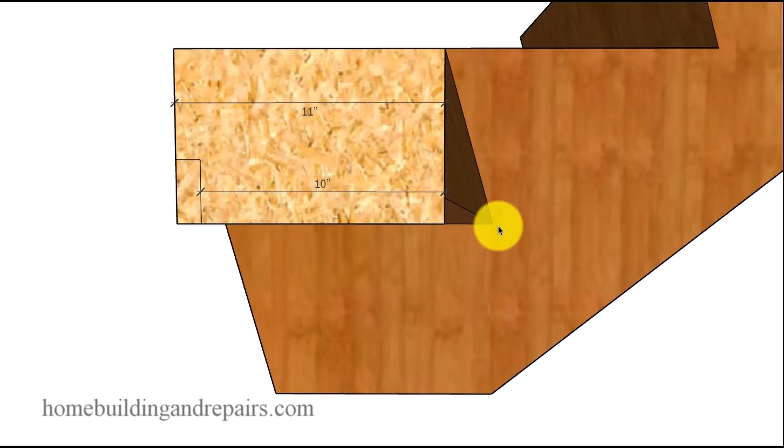Here we have basically the same thing, a 2-inch undercut. So from the tip of the nosing, we are breaking the projection rule for the nosing, and we do not have the minimum tread depth. And again, these are all stairs I have seen built, and they aren't as difficult to walk up, but they are difficult to walk down. And I believe I've stated that in other videos.

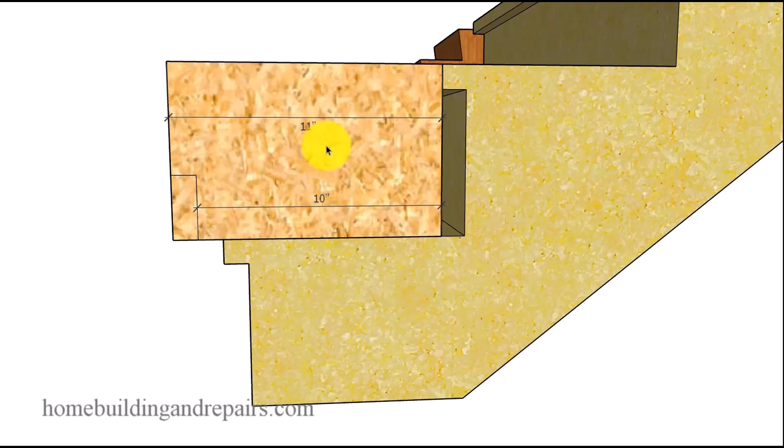So here we have a 9-inch stair tread with a 1-inch overhang. Again, this is probably something that's not going to make your building department happy. And here we have a 9-inch step with a 1-inch cutback. And that is it for the video.

I tried to make it as short as I could. I could have made it shorter, I guess, but what the heck? This is what you're used to with my videos. So hope it makes sense.